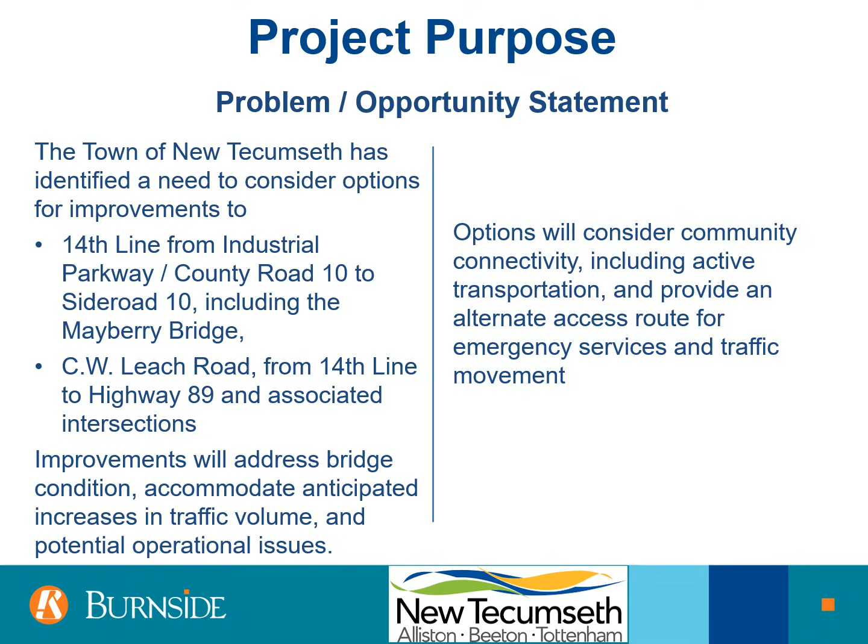This Public Information Center will provide an overview of the MCEA process, present information about the study area and the alternative solutions for the 14th Line and CW Leach roads. It will also request your input on the study and options being considered, and identify the next steps in the process, including identifying and evaluating design options for the road improvement alternatives.

Following the presentation, we invite you to offer your comments on this project, the alternative solutions and engagement materials presented. Information on how to provide your input to this study is provided at the end of the presentation. Your input is appreciated and is considered by the study team in the evaluation of the preferred solution.

The study area includes the 14th Line road corridor from Industrial Parkway, County Road 10, to Side Road 10, including the Mayberry Bridge, as well as the CW Leach Road corridor from 14th Line to Highway 89. The study will also consider intersection improvements for the intersections at 14th Line and 10 Side Road West, and 14th Line and Industrial Parkway, County Road 10, 14th Line and CW Leach Road, and CW Leach Road and Briar Hill Heights. The 14th Line serves as a key east-west arterial road connection in Alliston, connecting Industrial Parkway to Side Road 10.

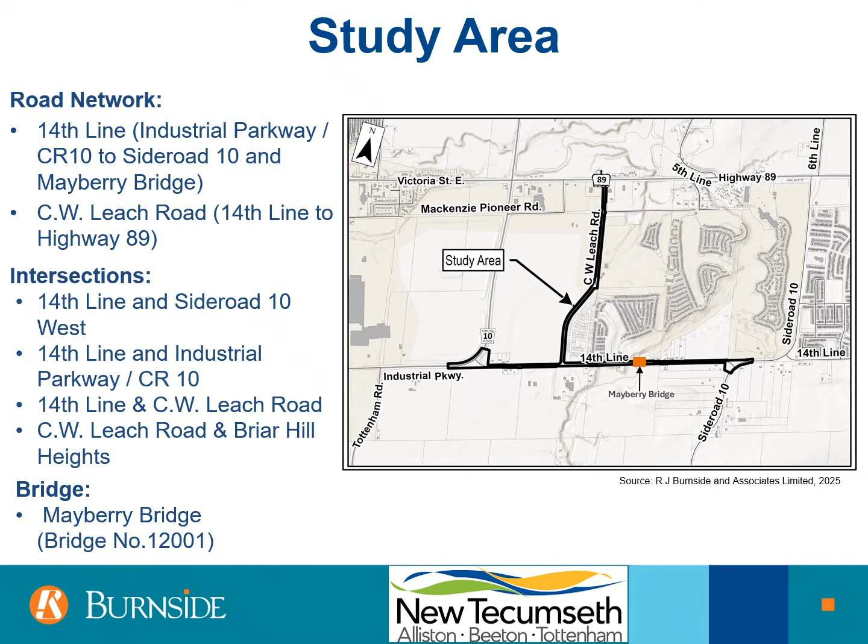The impacts of the alternative options are evaluated against the inventory of the natural, socio-cultural, financial, and technical environment of the study area, including possible mitigating measures. A summary of the criteria used for evaluation is provided under each environment category.

Key considerations in the development and evaluation of the alternative solutions for the study area will include the potential impact to existing natural features, minimizing encroachment on private property and the potential for land acquisition, maintaining access to properties, consideration of pedestrians and active transportation along the corridor, working within existing planning policy and regulations, maintaining traffic flow and connection along the road corridors in the study area, as well as providing capacity for future growth and traffic.

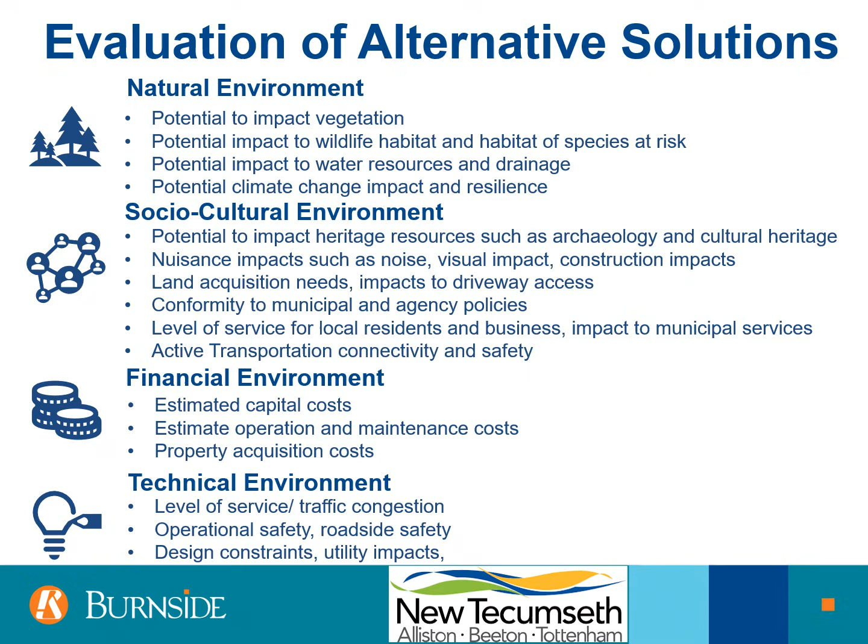The 14th line and C.W. Leach Road MCEA is also guided by the policies and objectives outlined in other municipal planning documents, which outline strategies for growth and infrastructure, such as the Town of New Tecumseh's Official Plan, the Town of New Tecumseh Multimodal Active Transportation Master Plan, and the County of Simcoe's Official Plan.

The town's previously completed Multimodal Active Transportation Plan provided analysis and recommendation for the widening of the 14th line from 2 lanes to 4 lanes with active transportation. The MCEA will also have regard for policies of the provincial government through the Ministry of Transportation and other agencies.

Several other studies completed within or adjacent to the study corridor will inform the project, including the Honey Hill Residential Subdivision Traffic Impact Study, the 2018 Roads Needs Study for the Town of New Tecumseh, which supports widening of the 14th line based on current and forecasted annual daily traffic, the 14th line Fire Hall Traffic Impact Study, and the Traffic Impact Study for the 14th line being completed by Honda Canada that is currently in progress.

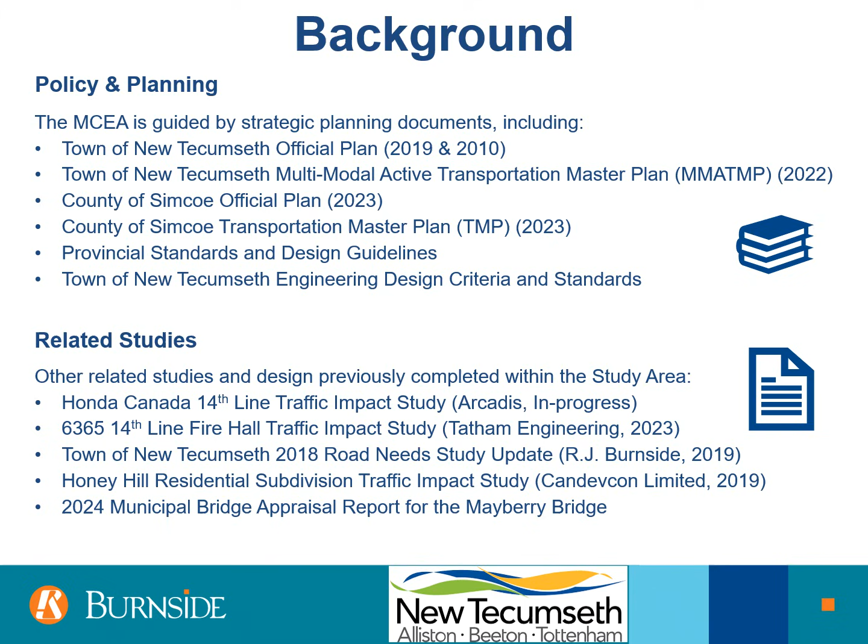The selection of the preferred improvement options for the study area is determined through an evaluation of impacts and benefits of the options on the existing conditions. The existing conditions of the study area are considered under 4 environments, including the technical, socio-cultural, financial, and natural environment of the study area. The following slides provide a summary of the existing conditions in the study area for these environments.

The 14th line road corridor from Industrial Parkway, County Road 10, to Side Road 10 is a 2-lane, undivided east-west arterial road within the jurisdiction of the Town of New Tecumseh. The posted speed limit is 60 kilometers per hour with varying 20 to 28 meter right-of-way. An annual average of 9,900 vehicles per day travel along the road corridor. Vehicles are restricted to a load limit from March 1st to May 1st annually.

Intersections influencing the 14th line corridor study area include Industrial Parkway, C.W. Leach Road, Point Vecchio Lane, and 10 Side Road East and West. The Mayberry Bridge is also included in this section of the 14th line. The Mayberry Bridge is a 2-lane, 3-span structure that was built in 1940. The speed limit posted is 60 kilometers per hour with an advisory limit of 40 kilometers per hour. The bridge has been recently assessed to be in poor condition, nearing the end of its lifespan and requiring replacement.

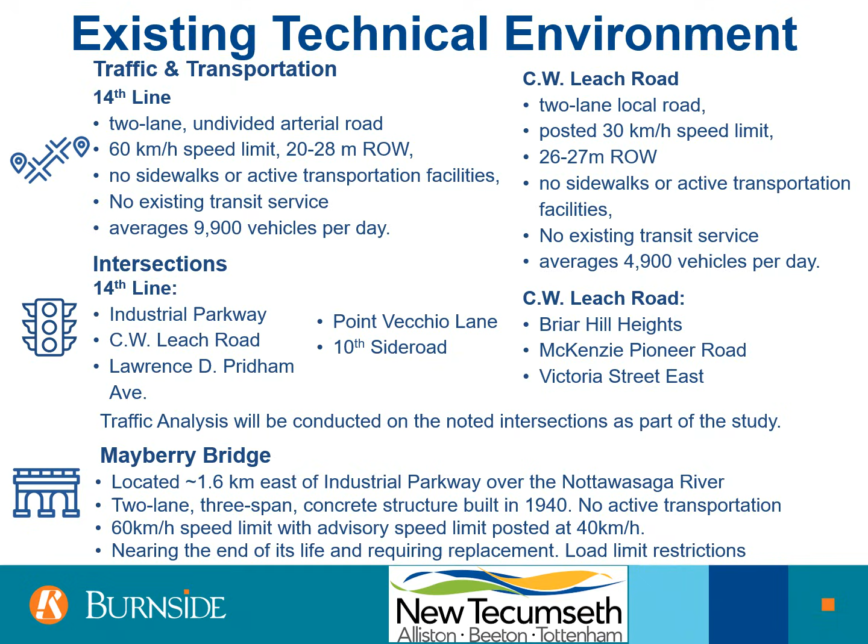Future traffic conditions in the study area will be reviewed for the years of 2035 and 2055. The future traffic conditions will be developed based on historical traffic growth on study area roads, traffic from planned future general growth, and from new developments. The projected increase in traffic is expected to exceed the recommended lane capacity of 1,000 vehicles per hour traveling in a single direction. Less capacity reduces travel speeds and increases delays traveling along the study area corridor.

Less capacity also results in long delays at intersections, with the potential for collisions as motorists accept shorter gaps to complete turns. Traffic analysis will be conducted for the intersections included in the 14th line and C.W. Leach Road study area.

The study will also evaluate and account for the additional technical factors, including utilities and stormwater management. Buried and overhead lines such as telecommunications, hydro, and gas are present along the corridor. Stormwater is collected in open ditches and culverts along the road study corridors.

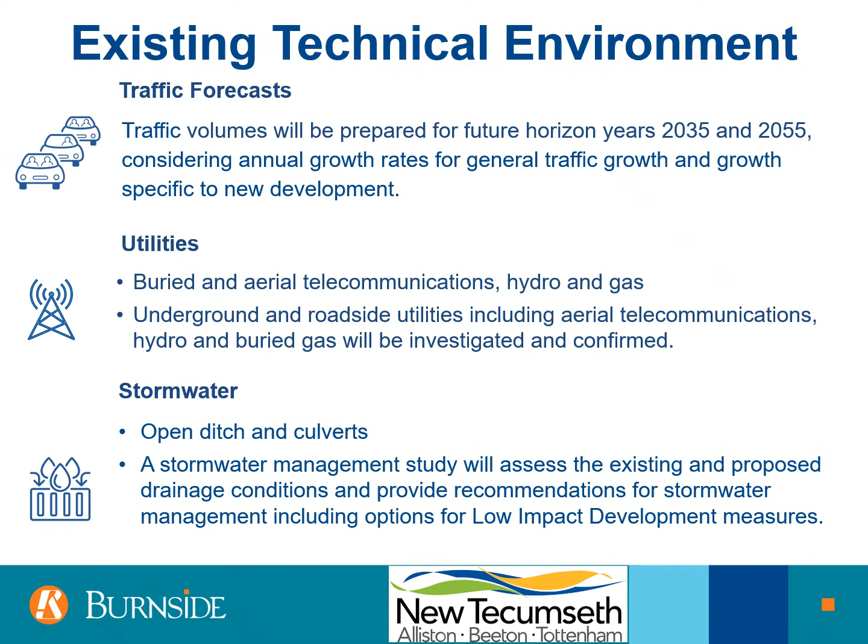The presence of underground and roadside utilities will be reviewed and confirmed as part of the existing conditions of the study area, and a stormwater management report will be completed to assess the existing and proposed drainage conditions. The feasibility of low-impact development measures will be included as part of the study.

The assessment of the natural environment was completed through a desktop study and field investigation to characterize the vegetation communities and the potential for habitat species at risk in the study area. The natural features in the area consist of forests, wetlands, watercourses, and meadows, and land use being identified as commercial, urban residential, employment area, agricultural, environmental protection 1 and 2. Vegetation communities observed in the study area are considered to be relatively common in Ontario.

The area contains a mix of unevaluated wetlands, significant woodlands, valley lands, as well as 3 watercourses, including the Nottawasaga River. A portion of the study corridor is also part of the Nottawasaga Valley Conservation Authority regulated area associated with the Nottawasaga River, an unnamed tributary, and an unnamed watercourse. The Nottawasaga River has been confirmed to provide permanent fish habitat, while the unnamed watercourse and unnamed tributary may provide seasonal fish habitats.

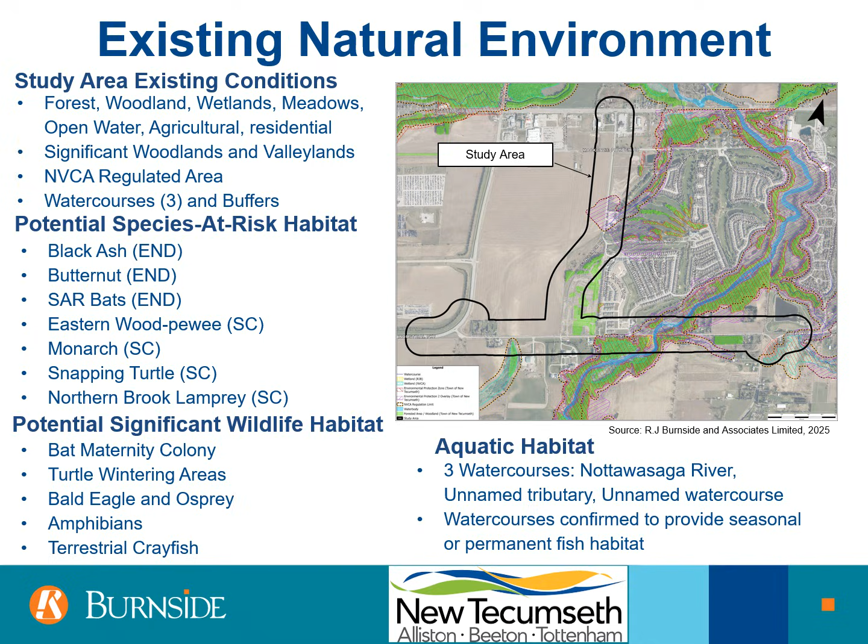Habitat within the study area may support significant wildlife habitat as potential nesting, foraging, or breeding. Habitat observed in the study area has the potential to support species at risk, including the potential for at-risk bats, trees, birds, turtles, and fish. Species at risk were not observed in the study area during the field investigation.

Active transportation facilities are not present on the 14th line from Industrial Parkway to Side Road 10, or along C.W. Leach from 14th line to Highway 89. The only road in the study area that includes a sidewalk is Mackenzie Pioneer Road, which includes a sidewalk on the east side near the intersection of C.W. Leach Road.

The town's Multimodal Active Transportation Master Plan, MMATMP, has identified improvement options for the 14th line to include widening from 2 lanes to 4 lanes, with consideration of paved shoulders with a buffer or multi-use trail for active transportation, and a desired right-of-way width of 36 meters.

The MMATMP also identified improvements for C.W. Leach Road to include consideration of a multi-use trail for active transportation, as well as improvements for the 14th line and Side Road 10 West, 14th line and Side Road 10 East, and County Road 10 and Industrial Parkway intersections.

To address the current and future road capacity needs, and active transportation recommendations for the study area, a multimodal transportation assessment will be completed.

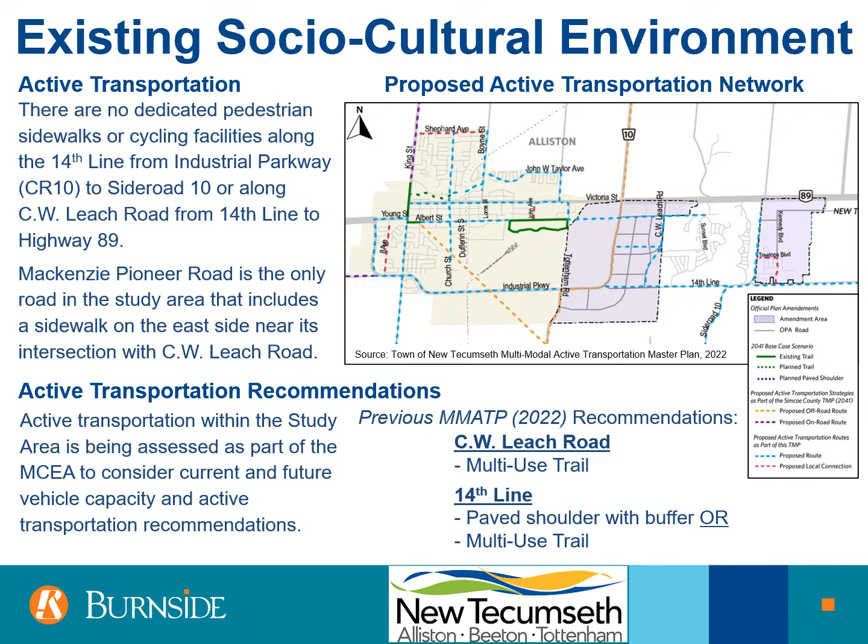The study area includes land use designated as commercial, urban residential, employment area, agricultural, and environmental protection.

The 14th line is the preferred east-west travel route connection between Alliston and new growth areas, connecting Industrial Parkway to Side Road 10. C.W. Leach Road serves as a key north-south connection between 14th line and Highway 89, and also serves to support local residential traffic to the Briar Hill Heights and Treetops communities.

The town of New Tecumseth promotes the conservation and protection of the town's important built heritage resources and cultural heritage landscapes. The town's registrar contains 36 designated heritage properties, none of which are located in the study area. A cultural heritage assessment identified 2 built heritage features in the study area.

A Stage 1 archaeological assessment determined parts of the study area have archaeological potential and will require further archaeological assessment prior to any construction activities if impacted. The extents of potential impacts are assessed as part of the MCEA and confirmed during the detailed design stage of the project.

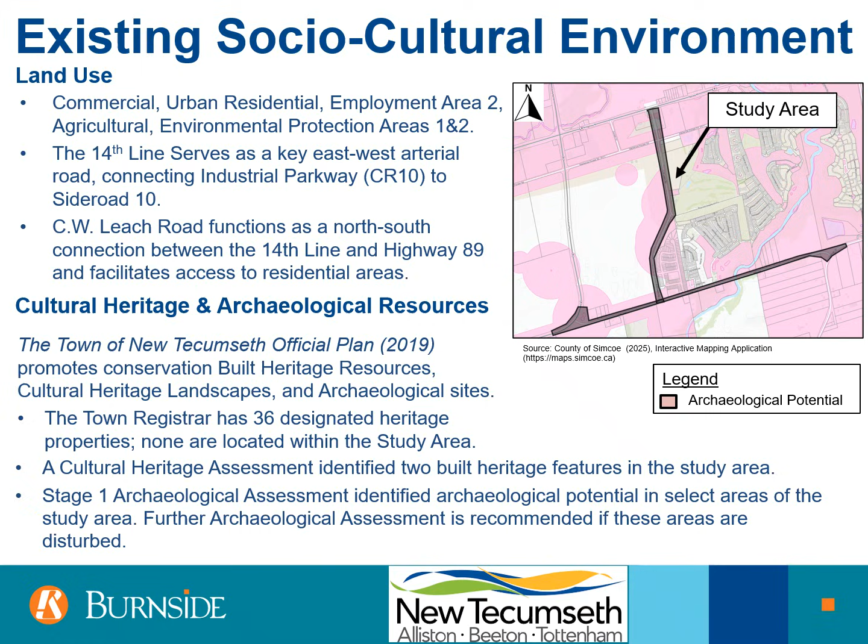The widening of 14th line from 2 lanes to 4 lanes from Industrial Parkway to Side Road 10 will be assessed as part of implementing the preferred solution identified in the 2022 Multimodal Active Transportation Master Plan to maintain acceptable capacity for future traffic volumes as well as to improve travel time and traffic flow.

As the 2022 MMATMP was completed to address phases 1 and 2 of the MCEA process, in this phase of the MCEA, the 4-lane widening of 14th line was reviewed to confirm the recommended solution that was identified in the MMATMP and will consider the options for active transportation facilities along the corridor.

The alternatives for the 14th line corridor within the study area include: 1. Widen to 4 lanes with a multi-use path on one side, or 2. Widen to 4 lanes with paved shoulders and buffer from the roadway on both sides. The replacement of the Mayberry Bridge will be included as part of each of these alternatives.

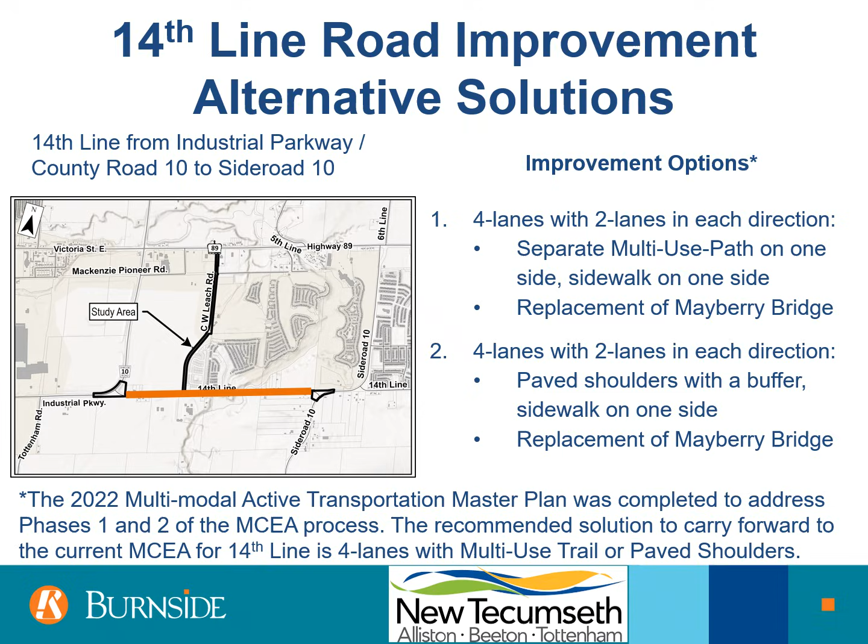Alternative 1 features a 4-lane road section with 2 travel lanes in each direction, with a multi-use path on one side of the road and a sidewalk on the other side. The posted speed limit is anticipated to remain the same. Roadsides would include barrier curb. Parking would not be permitted on the road. Roadside utilities would be relocated as required to accommodate the reconstruction. Property acquisition is anticipated for the road widening.

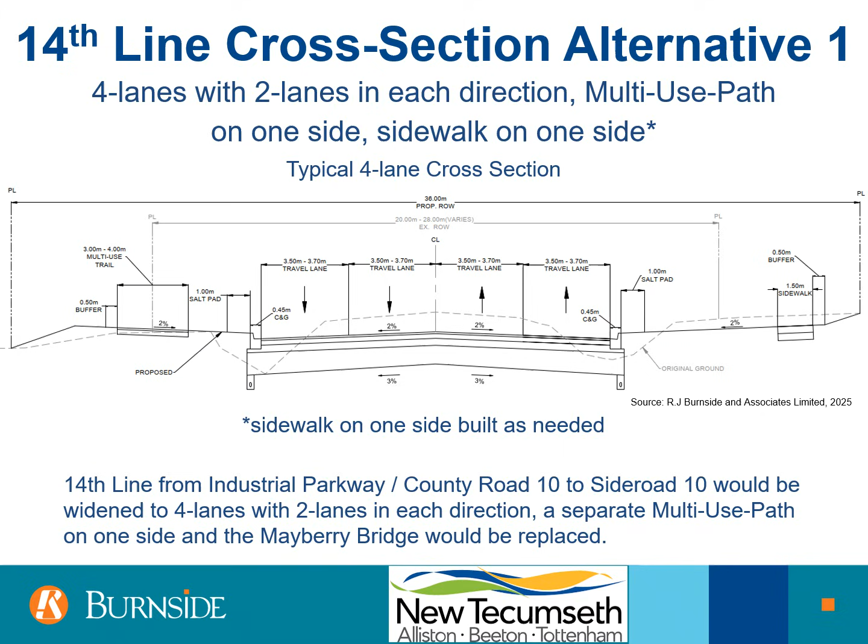Alternative 2 features a 4-lane road section with 2 travel lanes in each direction, with paved shoulders on both sides and a buffer between the roadway and the shoulder. The posted speed limit is anticipated to remain the same. Roadsides would include barrier curb, and parking would not be permitted on the road. Roadside utilities would be relocated as required to accommodate the reconstruction. Property acquisition is anticipated for the road.

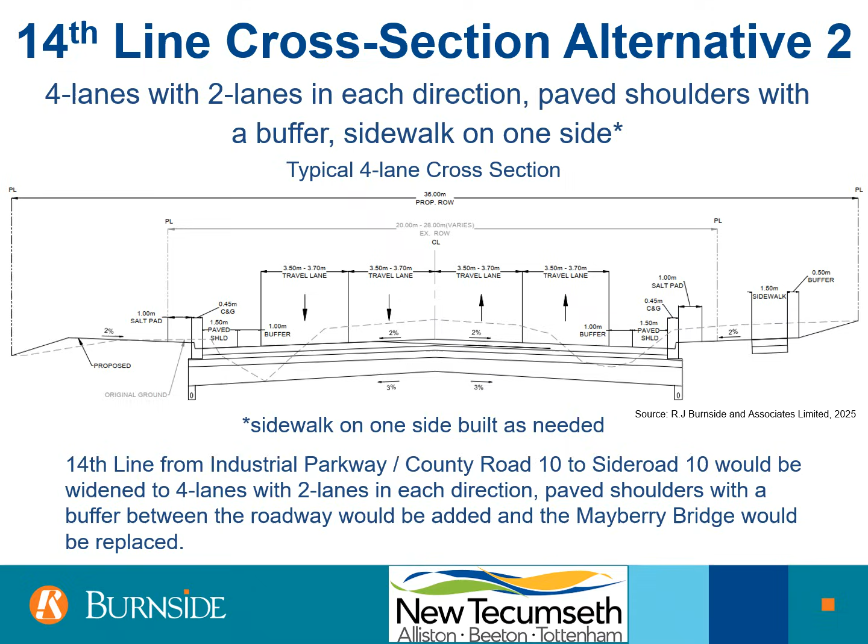The evaluation of cross-section options for the 14th Line were compared based on the level of anticipated impact to criteria under each of the natural, socio-cultural, financial, and technical environments. The table provides a summary of the evaluation of options as an average range under each environment category. A ranking from most preferred to least preferred was applied based on the level of anticipated impact for each criterion, with an empty pie representing the least anticipated impact and therefore most preferred, to a full pie, representing the greatest anticipated impact, and therefore least preferred.

Option 1, 4 lanes with a multi-use path and sidewalk on one side, was evaluated as the preliminary preferred option for the 14th Line study corridor. This option provides off-road active transportation facilities for both improved safety and access for multiple users, with a dedicated space for pedestrians.

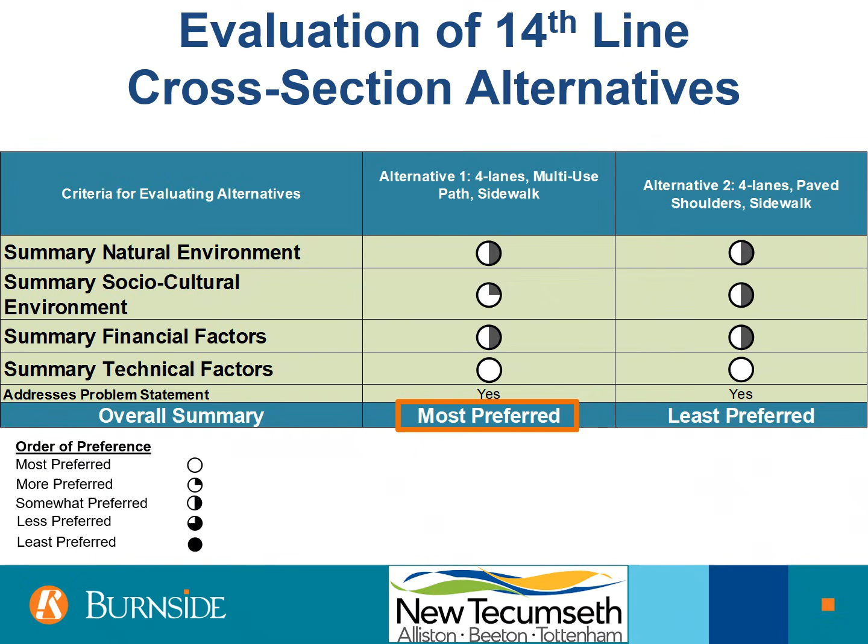Alternative 1 is the preliminary preferred cross-section for 14th Line, including a 4-lane road section with 2 travel lanes in each direction, a multi-use path on one side of the road and a sidewalk on the other side. With this alternative, the Mayberry Bridge would be replaced with a 4-lane bridge with consideration for active transportation.

The widening of the 14th Line study corridor will be completed as part of implementing the preferred solution of the MMA-TMP to maintain acceptable capacity for future traffic volumes, travel time, and traffic flow. Implementation will be dependent on development in the area and subject to funding approval.

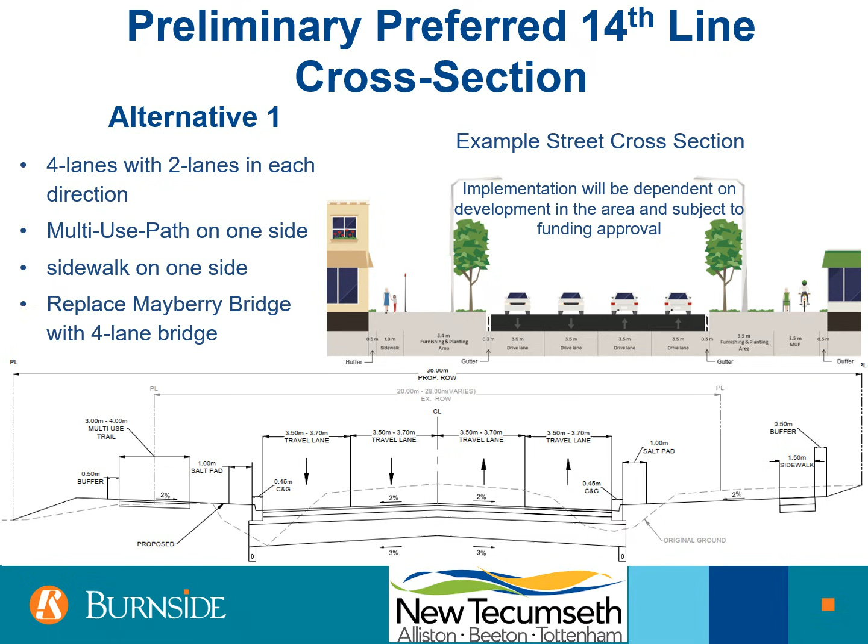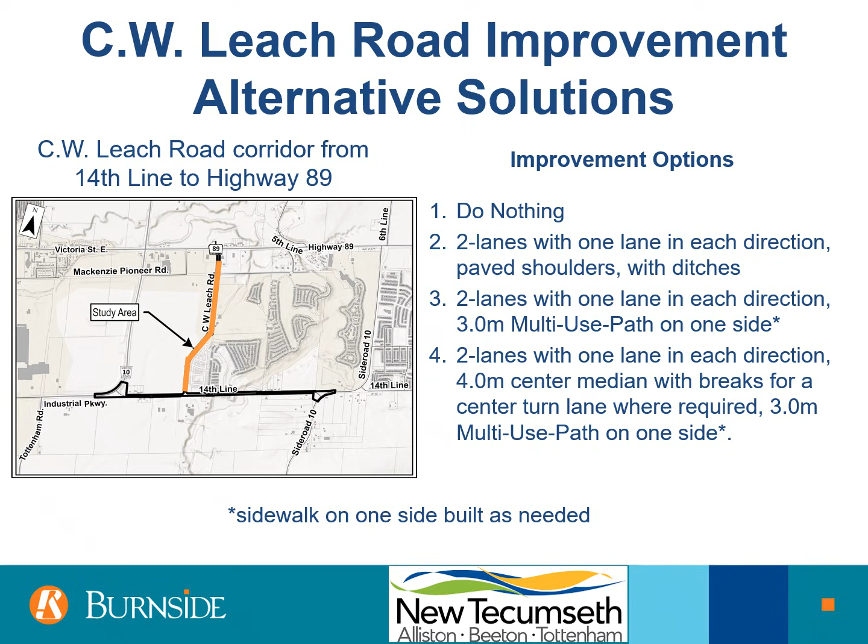Alternative 1, do nothing, is a mandatory requirement for consideration in the municipal class environmental assessment process. In this option, the study area would remain the same without improvements for C.W. Leach Road corridor from the 14th Line to Highway 89.

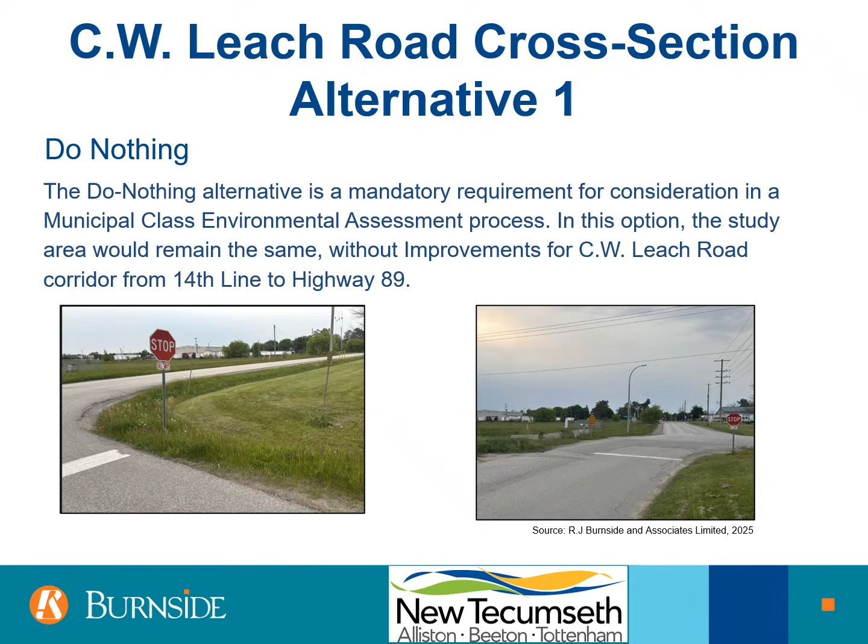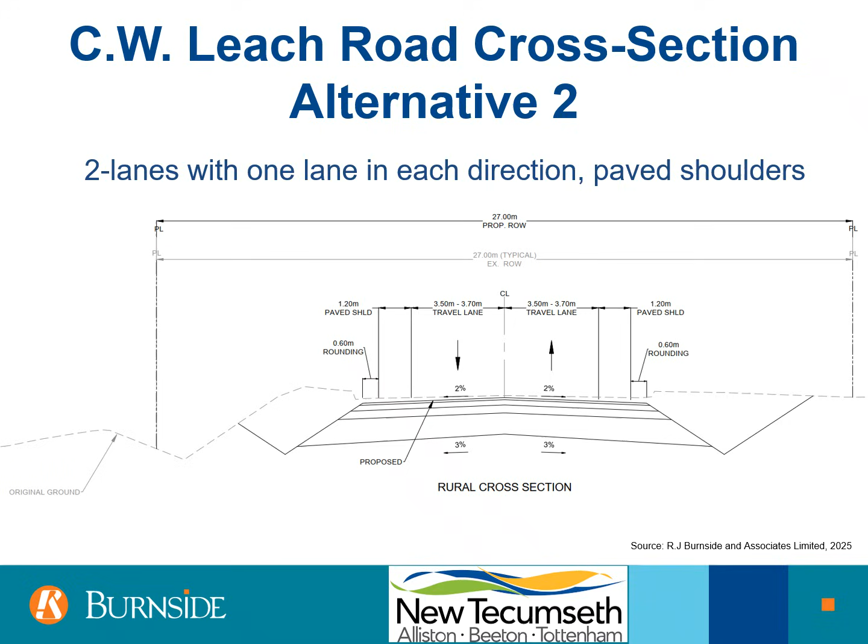Alternative 2 features a 2-lane road section with a travel lane in each direction, with paved shoulders on both sides and a buffer between the shoulder and the roadway. The posted speed limit is anticipated to remain the same. Roadside ditches would include options for an LID design. Parking would not be permitted on the road. Roadside utilities would be relocated as required to accommodate the reconstruction.

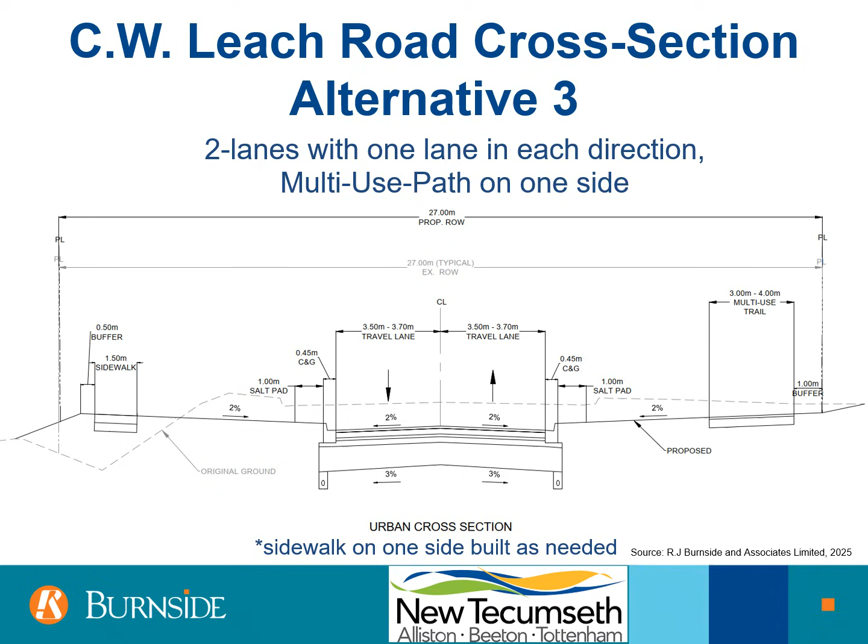Alternative option 3 features a 2-lane road section with a travel lane in each direction, with a multi-use path on one side of the road and a sidewalk on the other side, located within the existing right-of-way. The posted speed limit is anticipated to remain the same. Roadsides would include barrier curb and gutter. Parking would not be permitted on the road. Roadside utilities would be relocated as required to accommodate the reconstruction.

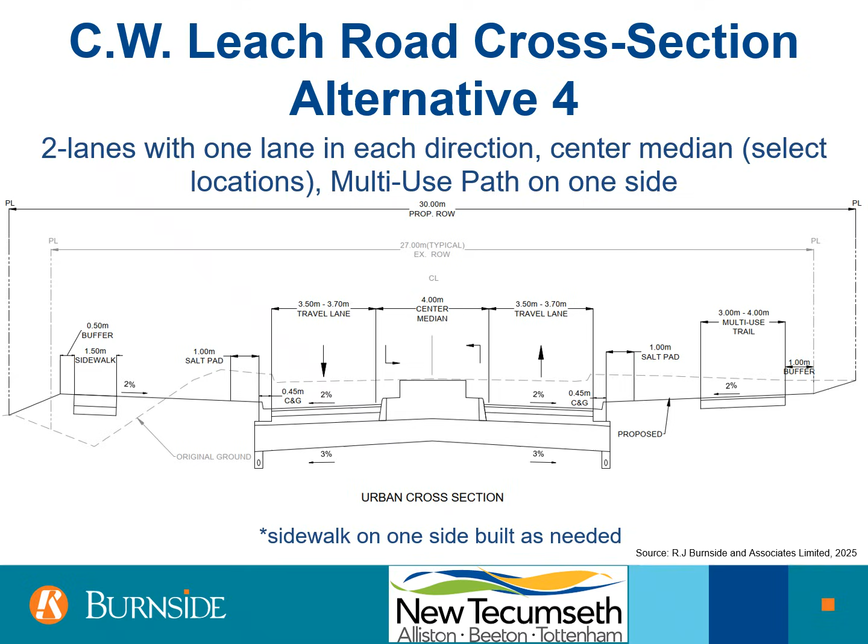Alternative option 4 features a 2-lane road section with one 3.5-meter wide travel lane in each direction, with a 4-meter center median in select locations, as well as breaks in the center turn lane where required. A 3-meter multi-use path on one side of the road. The posted speed limit is anticipated to remain the same. Roadsides would include barrier curb. Parking would not be permitted on the road. Roadside utilities would be relocated as required to accommodate the reconstruction.

Option 3, two lanes with a multi-use path and sidewalk, is the preliminary preferred option for the C.W. Leach Road within the study corridor. This option is anticipated to have some impact on the natural environment, with a right-of-way similar to Alternative 2. However, impact is anticipated to be limited as improvements are primarily located within the existing right-of-way, with some grading into adjacent property.

Option 3 and Option 4 are similarly preferred under the socio-cultural environment, as both options provide access for multiple active transportation users with off-road active transportation facilities. The options are also preferred under the technical environment, as both will accommodate future traffic. Safety is improved with a dedicated sidewalk for pedestrians, with increased distance between the active transportation facilities and the vehicle travel lanes. Costs are anticipated to be moderate to high for construction of active transportation for Option 3, compared with anticipated higher costs, including a center median and turn lanes, for Option 4.

Maintenance costs are anticipated to be similar to other options, with the exception of the do-nothing option. The do-nothing option does not meet the problem statement and is not carried forward. A median with center turn lane may be considered in select areas of the road corridor to enhance the preferred solution as needed to facilitate and improve traffic flow and safety of turning movements, and or to support opportunities for placemaking.

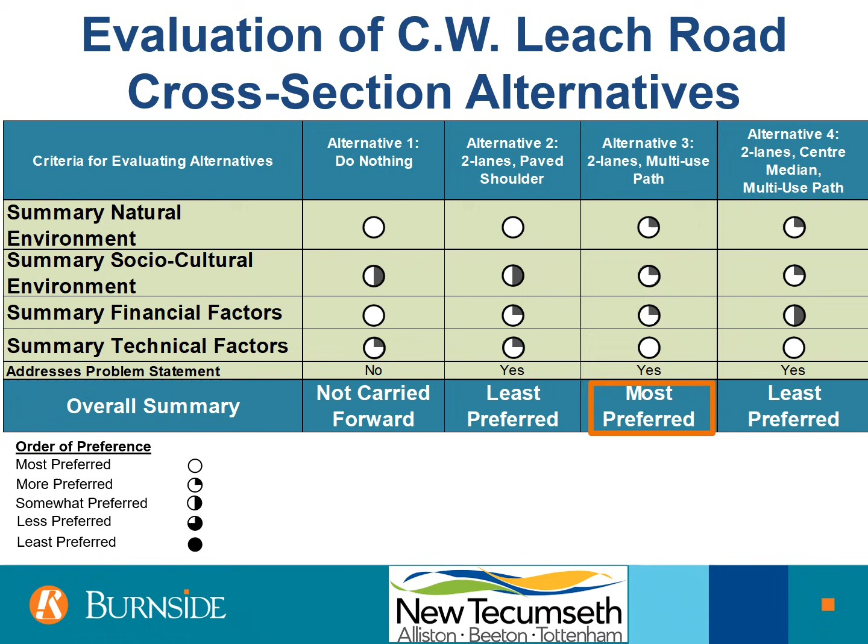Alternative 3 is the preliminary preferred cross-section for C.W. Leach Road. C.W. Leach Road would be constructed as a two-lane road section along the length of the corridor, with one vehicle travel lane in each direction, a multi-use path on one side of the road, and a sidewalk on the other side.

The preliminary concept may include implementation of the center median and turning lanes in the residential development area in the southern section of the corridor as a gateway and placemaking feature, depending on the development in the area and subject to costs and funding approval.

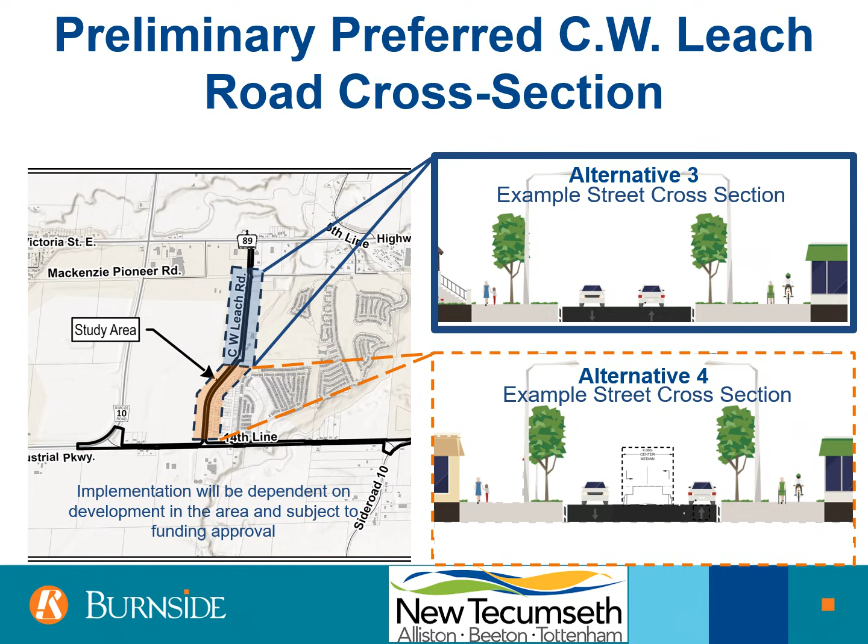In the next phase of the Schedule C MCEA, the design options for implementing the preferred solution will be confirmed. Design concepts for the 14th Line Study Corridor and C.W. Leach Study Corridor will include a best fit alignment and integration with existing intersections, including the evaluation of intersection options for the preferred cross-sections and the replacement of the Mayberry Bridge.

Possible design alternatives for intersections include stop signs, traffic signals, or roundabouts. Design alternatives will be evaluated for the intersection of 14th Line and C.W. Leach, 14th Line and 10th Side Road, C.W. Leach Road and Briar Hill Heights, and Industrial Parkway, or County Road 10, and 14th Line.

The intersection of Industrial Parkway and 14th Line is under the jurisdiction of the County of Simcoe. Improvements to the intersection will require coordination with the county. Victoria Street, also known as Highway 89, and C.W. Leach Road intersection is under the jurisdiction of the Ministry of Transportation. Any future upgrades to this intersection will require approval and coordination with the Ministry of Transportation.

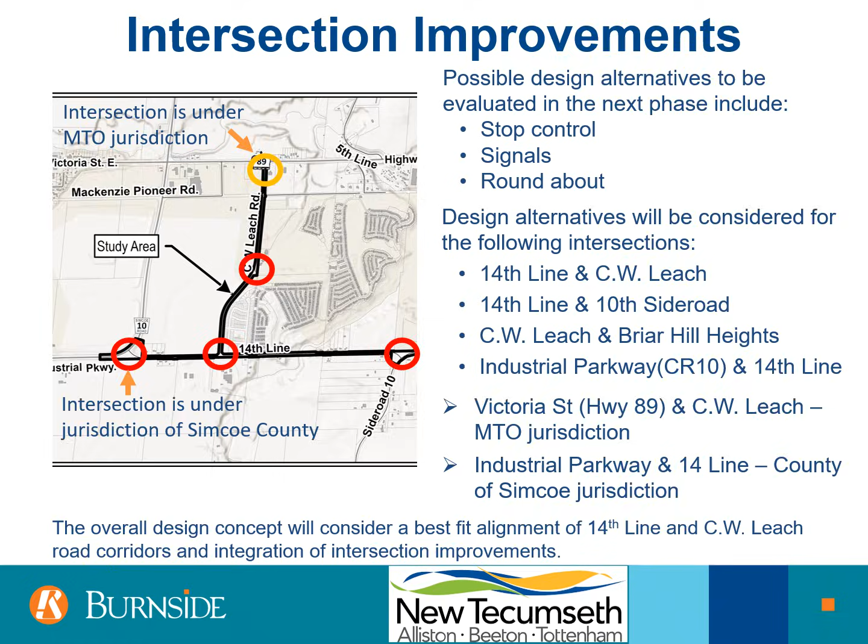Following the input received from the online Public Information Center number 1, the study team will confirm the preferred cross-section for the 14th Line and C.W. Leach Road corridors. The next step is to develop and evaluate design options for the preferred cross-sections. These design options will be evaluated and presented at Public Information Center number 2. The preferred design concept will be confirmed following PIC number 2 public review and feedback.

At the conclusion of the MCEA process, an environmental study report outlining the planning and decision-making process will be prepared for public review and comment for 30 days following the notice of completion of the study. At this time, it is anticipated that the notice of completion will be published in early 2027, followed by a detailed design and implementation of the project.